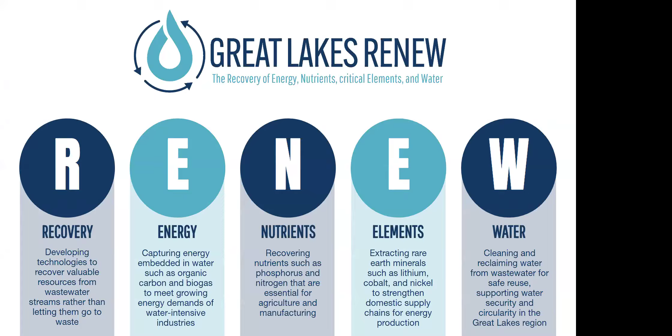As mentioned, Current is the anchor organization behind the NSF-backed Great Lakes Renew Innovation Engine. This is an up to $160 million award from the NSF over 10 years, and it's focused on the recovery of energy, nutrients, critical elements, and water from what is historically considered waste streams. Great Lakes Renew has a couple key objectives. The first is to spur the circular economy transition, to support the invention and commercialization of selective separation technologies, and to attract and retain water-intensive industries into the Great Lakes region, which is inclusive of 6 states around the Great Lakes, including Minnesota, Wisconsin, Illinois, Indiana, Ohio, and Michigan.

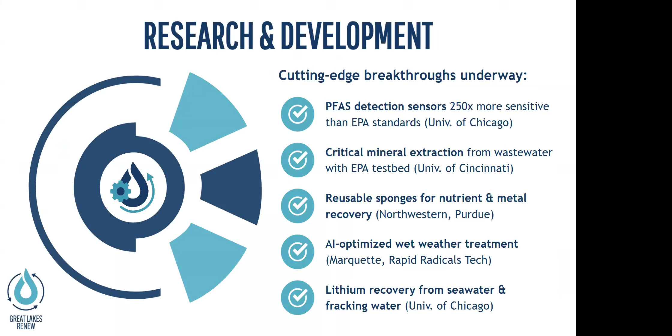One of the arms that Great Lakes Renew and Current uses to support this recovery of critical materials is supporting research and development projects. Here are just some examples of amazing projects that we are currently funding throughout the Great Lakes region, from PFAS detection to critical minerals extraction to AI optimized wet weather treatment. If you want to learn more, we could talk about this all day, but we do want to transition over to our speaker. You can scan that QR code, which will take you to Current's website. You can also connect with us on socials, and subscribe to our newsletter.

Without further ado, I will pass it off to one of our partners, Dr. Soryong Chae, who will introduce our speaker. And just to give everyone an awareness of how the structure will work, we will have about 45 minutes of presentation from Dr. Jason He, and then about 10 minutes for questions and answers and discussion. Feel free to drop any questions in the Q&A box while we are presenting. So I'll pass it off to you, Soryong.

Thank you, Tyler. Hello, everyone. My name is Soryong Chae at the University of Cincinnati. It is my great pleasure and honor to introduce our speaker today, Dr. Jason He. He is the current Laura and William Jens Professor and Associate Chair of the Department of Energy, Environmental, and Chemical Engineering at Washington University in St. Louis. Prior to joining this university, he was a professor at Virginia Tech. He has published more than 280 journal papers and received several national and international awards. He is serving as editor of Journal of Hazardous Materials and Water Environment Research. He was also named a fellow of IWA, the International Water Association, and the Water Environment Federation. Now I pass over my microphone to Dr. He. Please, the stage is yours.

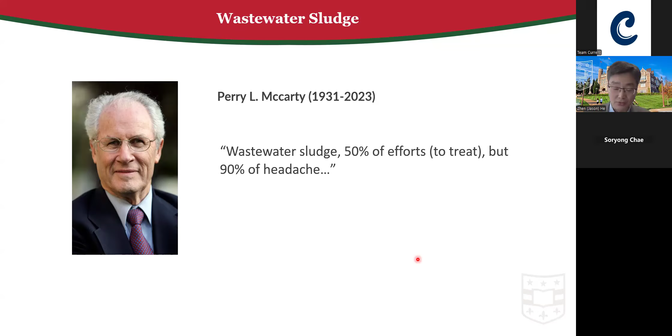Just in case some of the audience isn't familiar, though I assume most of you know it: when we talk about wastewater sludge, actually 98-99% of sludge is still water.

In a municipal wastewater treatment process, we have two types of sludge. Primary sludge consists of large particles, mostly organic materials and other contaminants that precipitate in the primary clarifier. We also have secondary sludge, also called waste activated sludge, or WAS, which is the group of microorganisms we use to treat wastewater. They grow too much, so we have to discharge some of them. So we have two types of sludge.

There are different ways to treat this sludge, and one of the most popular is anaerobic digestion. Idea-wise, it's a 100-year-old, very mature technology. It can greatly help reduce solid content with the byproduct of biogas, which is a source of renewable energy. The approach depends on the area and the preference of the operator.

Sometimes people only treat the primary sludge because it's a really good substrate. The headache probably comes mostly from secondary sludge, because you're trying to use one group of microorganisms to eat another group of microorganisms as a substrate. It's a bit challenging, so you might want to do a bit more pre-treatment.

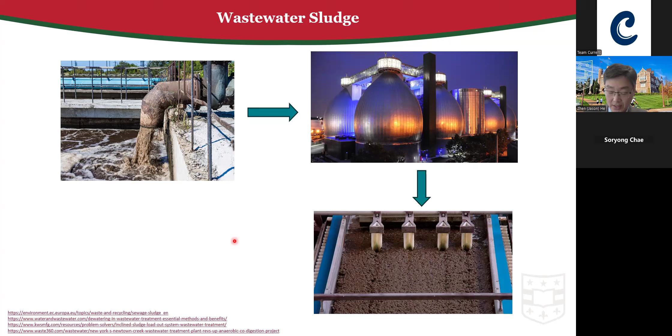Anyway, after sludge treatment, you still get like 98-99% water in that sludge. So next we do dewatering, removing water and reducing the water content, depending on the dewatering process, to 70-80% water. So you create a certain kind of solids, then send it away for further disposal. That's the overall process of wastewater sludge generation and treatment.

So there are definitely a lot of variables. What do we call a wastewater treatment plant? It's a wastewater treatment plant, right? But in recent years, probably the past 2 or 3 decades, more and more treatment plants started to use a new name: water resource recovery facility, or WRRF. That's really a change of mindset—let's look at waste as a resource.

Mainstream wastewater has low concentrations—phosphate is like 5 to 10 milligrams per liter, sometimes even lower, and ammonia nitrogen is like 30 to 50 milligrams per liter on average. It's just too low for meaningful recovery. But when you have a side stream—think about the treatment process I just mentioned, with the anaerobic digester treating the sludge, and after that dewatering—we only show the solid part you haul away, but you still have the reject water, which contains concentrations at least 10 times higher for both nitrogen and phosphorus. Then it makes some sense to do the recovery.

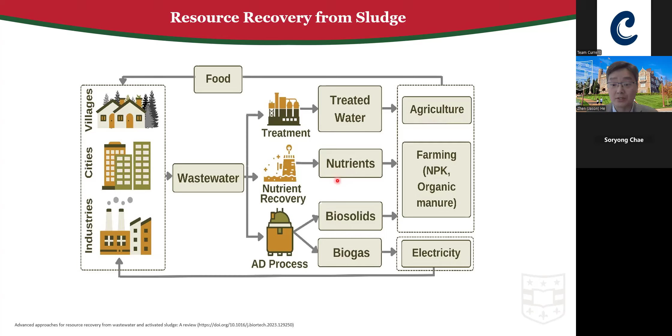I'm not going to go into a lot of detail on biosolids and biogas, because those are very mature technologies. So I'm going to focus on nutrient recovery using an electrochemical method here.

Well, I mentioned there's two types of nutrient, nitrogen and phosphorus. The bigger interest actually is in the phosphorus. It's not saying nitrogen is not important. It's just, think about the surroundings: almost 80% of the air is nitrogen. If we got a really cheap source of energy, you can always get ammonia, right? Although at this point, 1 to 2% of the world's electricity is used to synthesize ammonia, very energy intensive for sure, but you get the nitrogen available.

Phosphorus on the other side is a different story. The only source you get of phosphorus is from mining. So there's a limited storage, right? There are different sources to talk about. We have 100 years or 200 years or 50 years of storage. But anyway, it's limited, right?

So in nature, it takes millions of years for those phosphorus compounds to form phosphate rock. But in society, it only takes tens of years. So we get that phosphorus from the mining process and put it into food production. We consume it and release it to the environment. And if we want to collect those phosphorus compounds back into phosphate rock, it's millions of years. Literally not renewable for us, right? So then it makes some sense if we can get a shortcut to recover this phosphorus from the waste and

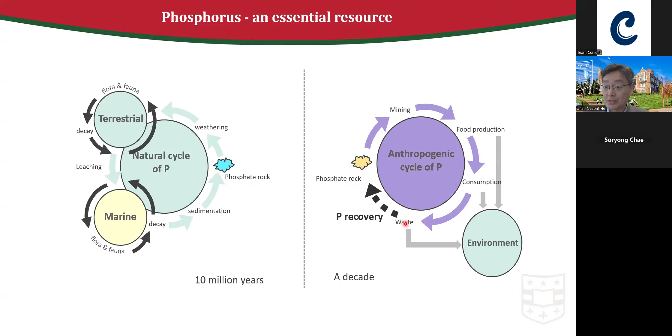reduce the whole process. The wastewater treatment plant, or wastewater resource recovery facility, is actually a major source of the phosphate waste. So this is a graph cited from this paper in STOTEN. It's 10 years old, but still valid, showing the major sources of the phosphate waste. The blue is the wastewater related source. And the green is food waste. You get the pet waste and the deceased pet and human, which all contribute to that waste.

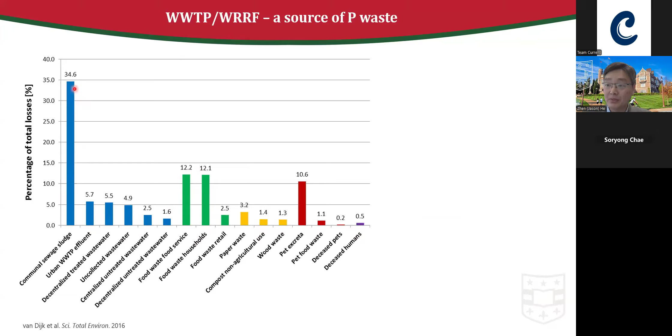But look at those blue ones. So the sludge is dominantly the source of the phosphate waste, right? So other than effluent, the aqueous part of the sludge is a very major source. And what do we do with the sludge? Let's see. This data is from EPA, fairly recent, 2024. Almost 60% land application. A quarter of the sludge goes to landfill. 14% incineration. So we talk about sludge ash, that's another treatment. Then there's 2% others.

So 60%, one may ask, what's wrong with that land application? We can use that as a fertilizer, which is true, right? Depending on the treatment process, you get class A, class B sludge. Some can be used as fertilizer, some just for land application. People are already practicing that for years. And why do we have to recover something from this sludge? Can we just use the treated sludge biosolids directly?

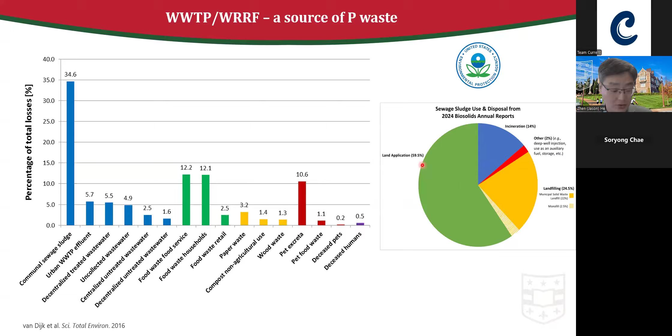Well, things are changing, right? There are always new things coming. And for environmental engineers, we don't want too many new things, especially contaminants, but unfortunately there are. And one of the most attended contaminants in recent years obviously is PFAS. So I just copied this news: Maine has become the first state to ban sludge land application. There are other states discussing and also may follow. So there are challenges to applying those biosolids to land.

So now we look at the issue that we have sludge. It's rich in nutrient. We can do something to recover it. And on the other side, we're facing increasing challenge to apply it directly as fertilizer or even for land application. What are we going to do? Can we come up with something to extract still valuable stuff out of this sludge as a part of its treatment? Because you have to do the treatment anyway. So even landfills are reluctant to receive sludge.

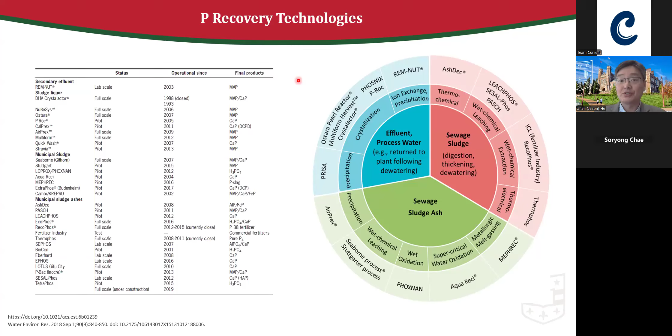Well, recovering phosphorus from wastewater and sludge, again, nothing new, right? There have been many technologies, many companies developing various technologies. So I'm citing the data from a review paper. Depending on the feedstock, you have the effluent process water, that's the rejected water from dewatering. You have the sewage sludge and the sludge ash after incineration. So there are many different products developed to recover phosphate.

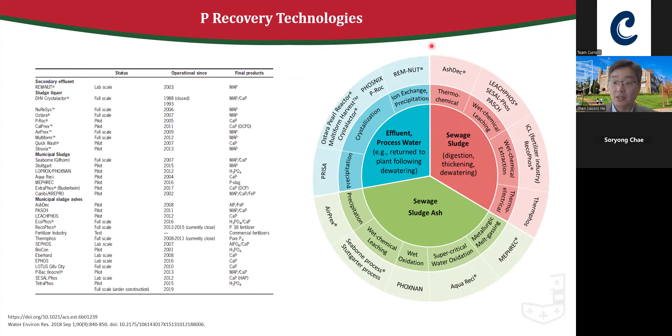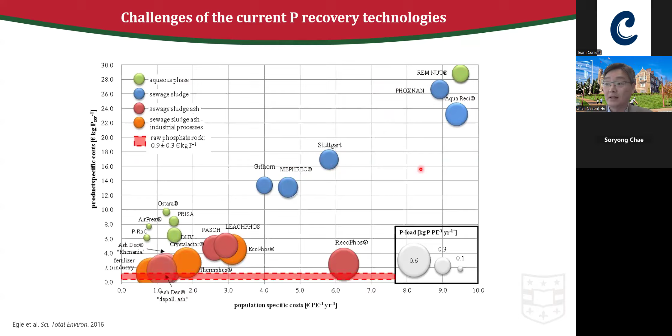So in general, when you look at phosphate recovery from sewage sludge, it's more expensive, right? So if there's an approach to reduce the cost overall, that can make this recovery more economically competitive. So how do we recover the phosphate from sludge?

We have technology like struvite recovery from aqueous phase. But think about this, in the rejected water, your phosphate concentration is like 50 to 70 or 80 milligrams per liter. There's a lot more phosphate in the solid phase, right? So if we add acid, we have a chemical leaching process, and that concentration can be increased to 250, 300, 350, depending on the waste - several times the concentration in the aqueous part.

So that really helps the downstream recovery process. This can be done by wet chemistry process - you add acid leaching, release that, then to recover it, it's the same old story: precipitation for phosphate. Okay, so it works. Then why do we need a new process?

There's always an issue with having to add chemicals, and there's a safety issue. A lot of our researchers don't really consider that, because in the lab we just ask our graduate student to transfer acid using a pipette. What's wrong with that? But in reality, operators have to deal with acid, strong base compounds, storage, transport. There's a lot of other issues involved, including further disposal and environmental impact when you generate such solutions.

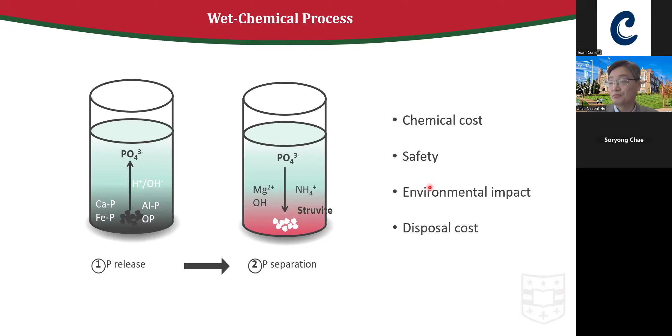So can we have an approach where we don't have to store the acid, store those dangerous chemicals? When we need it, we generate it. When we don't need it, we don't have to produce it or store it. So here comes the electrochemical process.

So electrochemical process - if you understand the battery fuel cell, I'm sure most of you understand that. It's pretty straightforward. We have an anode and a cathode, and at the anode is the oxidation process, the cathode is the reduction process. So the anode is going to produce protons - that means acidification, low pH, acid. And the cathode is going to have high pH, OH minus. So they create two different pH environments.

And we need to think about what we're going to do. Can we take advantage of that? Oh yeah, low pH leaching, right? So that's the acidification - we can leach the phosphate out of the sludge. And high pH precipitation, because for struvite or other ways you want to precipitate the phosphate, typically you have to elevate the pH, increase the pH. So we have these two different pH environments created by the same electricity.

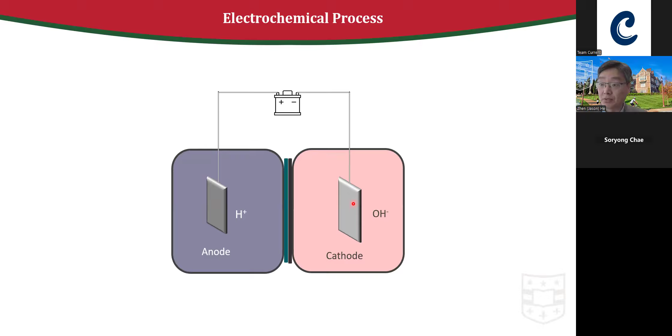Because for electrochemical reaction, the electron is going to move from one electrode to the other electrode. So the same electron transfer process generates two different pH environments. Then let's do something with that pH environment.

So a few years ago, we did a literature review to look at what people have already done, right? Certainly we're not the first - there's already a good amount of work in this field. So we wrote this review paper, looking at the different wastewater sludge feedstocks.

There's WAS, waste activated sludge, digested, just out of the anaerobic digester. Chemically enhanced sludge - there's a chemically enhanced phosphate removal process - and sludge ash after incineration. For the leaching process, that's where I'm going to focus today.

There are generally three approaches: electro-bio, and I'm going to go into a little more detail in the next slides, anode releasing and cathode phosphorus releasing. For the recovery process, I'm not going to go into a lot of detail.

In general, for recovery you need two steps. One is separation, right? You get them leached into the aqueous phase, you want to separate from other compounds that you don't want, then precipitation. So in general, those two processes are involved.

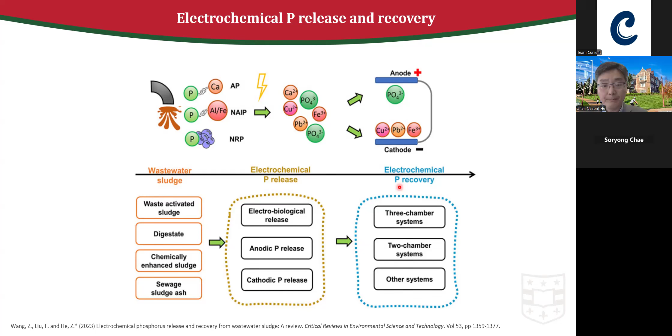So as I mentioned, I'm going to focus really on the releasing, the leaching part. The first method that people have already studied is called electrochemical plus bio - not very popular. Basically, they use electrochemical to destroy something and use bio either to further destroy a compound, release the phosphate, or create a microenvironment for low pH to release the phosphate. Not very popular. The second one, in the middle, is anode phosphorus releasing, the anode leaching.

This is very popular - I'm going to show you the data. Actually, high pH can also leach phosphate. You would think only low pH acidification works, but high pH can also leach phosphate. So we analyzed the literature data. On the X-axis you can see the number of studies by the time we published this paper, and the most studied is anode leaching. There were a few studies about electro-bio, a few about cathodic, and the leaching rate.

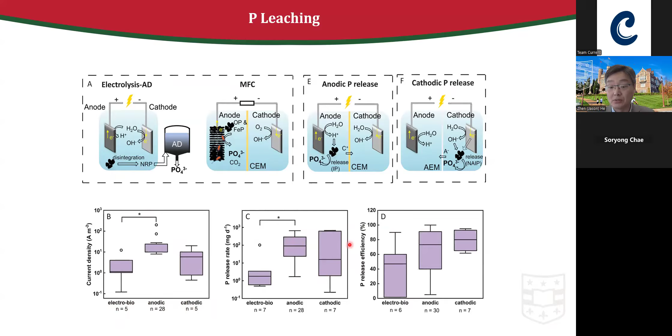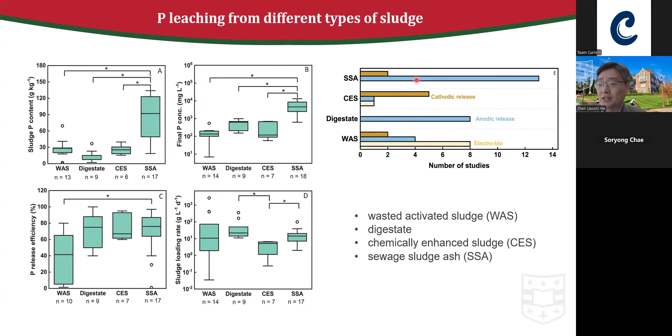And another thing I want to get your attention to is this graph. So ignore the other three graphs. This graph looks like there's a preference, right? Obviously there are more studies about the anode leaching, but there's also a preference to look at the anode leaching that works better for multiple substrates. So then we come to our own study.

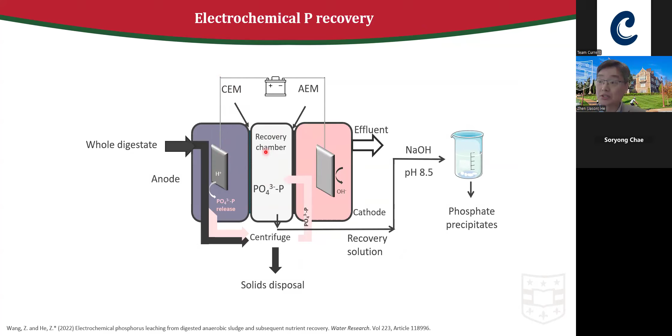That is because of what I just mentioned, there is a cation movement. When the electricity is applied, the oxidation happens, electrons are left, then you have something positive left. So that's ammonia. Ammonia moves from the anode into the recovery chamber. So this cell actually recovers both nitrogen and phosphate. We just focus on phosphate, but nitrogen is recovered at the same time.

Okay. And CO3 in the raw sludge, because AD usually contains high alkalinity, you do have that. That actually becomes quite challenging when you try to bring down the pH because the carbonate is going to consume protons first. So anyway, this comparison shows that the electrochemical process works. We can release the phosphate. We actually also get rid of the ammonia. Not really get rid of, we also recover ammonia.

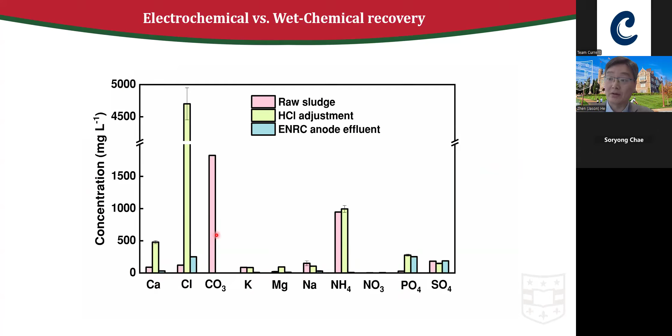We also remove a certain amount of the cations. When you look at the calcium, a lot of calcium here, and potassium, magnesium, but in the electrochemical system, not too much cations in the anode effluent because they also moved. So that's actually quite important for another issue that I'm going to talk about at the end of today, the dewaterability. I'll get back to that after a few slides.

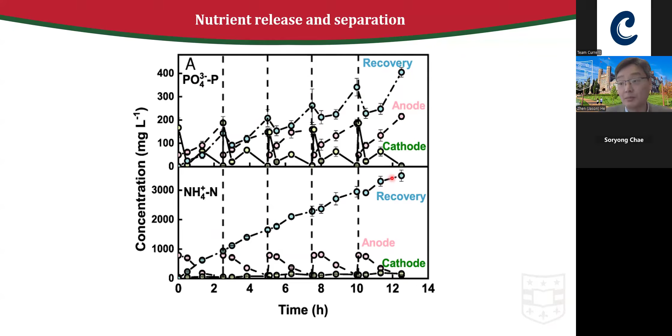So we show the repeated performance when you apply electricity. Those are the batch reactions. The blue ones are recovered. So you can see it's repeated performance. The concentration can get to like 300 to 400 milligram per liter. And this is the ammonia, as I mentioned. At the same time, we do get a recovery of ammonia to over 3,000 milligram per liter. It's like a byproduct at the same time. So it works. It works.

And we did a mass balance, to try to understand what's going on inside the system. You have to do a mass balance. We can get about 73% of phosphate in the recovered solution. That's the middle chamber, okay? And we have about 7% staying in that chamber, don't want to come out. So there could be precipitation. And we have about 10% in the cathode chamber. Remember, in the cathode chamber the pH is increased. There will be scaling, the precipitation. And we have another 10% which we have no idea where they went.

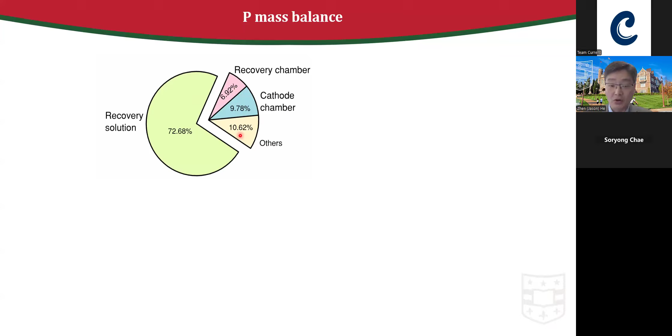Okay, so when students are doing experiments, they take samples like 1 milliliter, 2 milliliter from the cathode for analysis, so some phosphate is lost. So overall, we get about 73% recoverable phosphate. And then we'll precipitate those phosphates into a solid and further analyze the solid. And the phosphorus concentration is about 14 to 15%, similar to the rock.

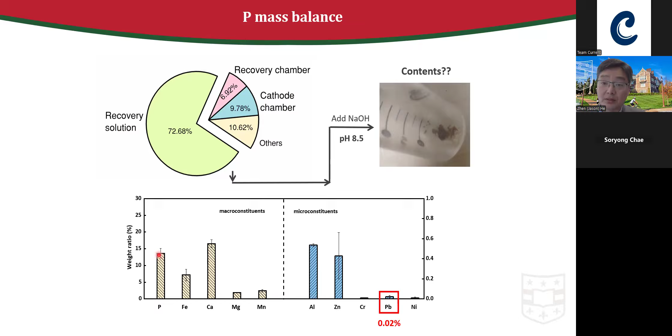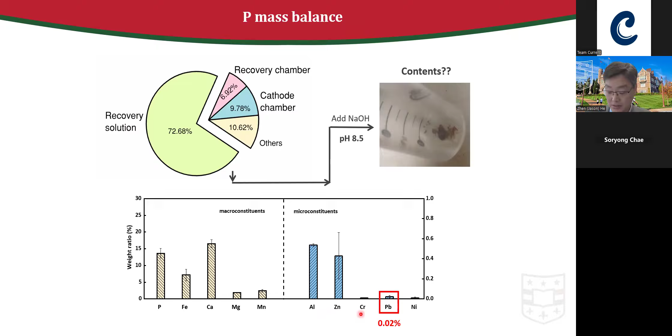Because when you recover the phosphate from wastewater sludge, you probably don't really apply it as fertilizer directly. Even though sometimes it's struvite, it's a really nice product recovered. And a lot of times they're still used as a feedstock for fertilizer production. So for a fertilizer factory, they really just look at the percentage of phosphorus in the feedstock. So the recovered solids are very comparable. Okay. And the heavy metal, that's another concern. So we look at the heavy metal, especially lead, 0.02%. The EPA regulation is 0.03%. So we can possibly reduce the contents of heavy metal and make it meet the EPA requirement.

So during the mass balance, it says about 10% of phosphate just stuck in the cathode. Okay, so they don't come out because of the precipitation scaling. That intrigued us to think, why don't we just recover them in the cathode, let all of them precipitate? Because for any wastewater treatment process or reactor, the simpler the better. The electrochemical system is complicated. You have anode, cathode, you have a membrane, and a three chamber, as mentioned. So that's complicated. That always means complicated operation and more expensive, right? More cost. So what if we just let them precipitate in the cathode and use a weak acid to wash them out? I mean, after some time, so not like after every batch.

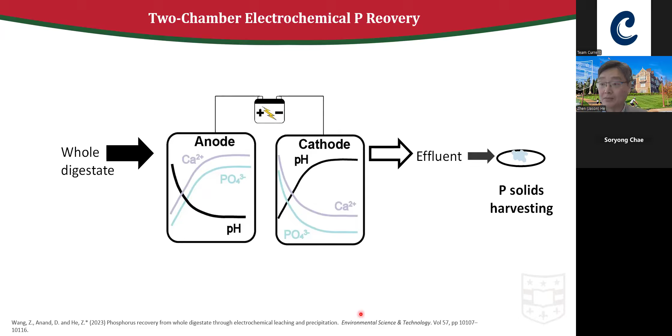So we did the experiment to simplify the reactor, and we can precipitate almost all of them. 98% of the phosphate precipitates in the cathode. And how fast they precipitate is affected by the current. So when you apply different amounts of current, that means how fast the reaction is going to be. So the precipitation rate will be different. But eventually, even at the low current, they can get 98% precipitation, right? The shorter the time, the shorter the retention time, then the smaller the reactor we can have. Again, it comes back to the cost.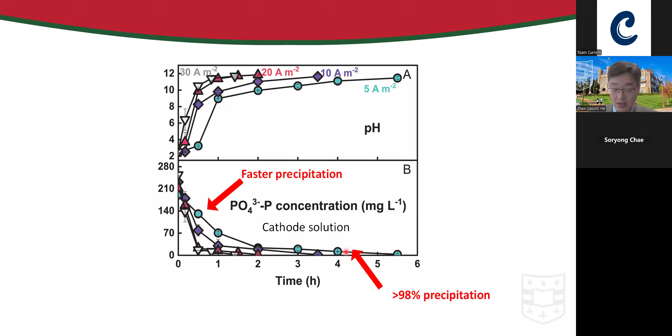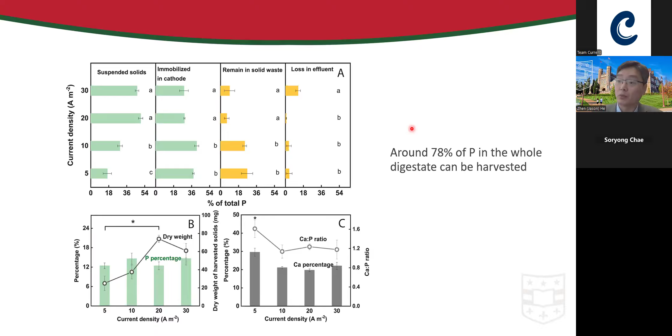And this is a very, very busy graph, so you don't have to look into the details. The main conclusion here is that around 70-80% of phosphorus in the whole digestate, not just the aqueous phase, can be harvested in this way. So previously in the three chamber, we got 73%. Here it is 78, close to 80%. So the recovery efficiency is kind of similar, right? It's a little bit higher, but reactor structure wise, it's a lot simpler. Okay. Again, it's really about the cost.

And we have extended operation for a reactor. You want to see how stable the reactor operation is. And the figure on top, that's the energy. We actually use the energy as an indicator. Should we do some cleaning? All right. So here, the dashed red line shows the benchmark, a new cathode electrode, because the precipitation is happening in the cathode. They're going to start to scale the cathode electrode. So if the energy consumption is around this dash line, fine, let's keep running.

Let's keep running and build up this precipitation. Once it goes up much higher, then we need to do some cleaning. You can see the higher peak for the blue one, that's a higher energy consumption, which means we do have to do periodical cleaning and maintenance, which is normal for any membrane-based process, right?

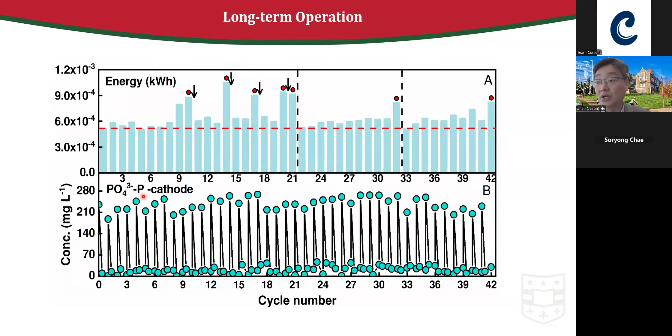And the phosphate concentration in the cathode is around 200 to 300 milligram per liter. It's a very stable performance over a long period of operation. The cost: the energy consumption also relates to the cost. So this is the comparison between our study and the literature.

If you look at the red zone, that's basically the lower recovery rate and higher cost, the least favorable, right? So we want to go to the green zone, this corner, with the higher recovery rate and the lower energy consumption. And here's where our study sits compared to the literature published before our study. So we can possibly bring down the energy consumption.

But where's the benchmark? Getting phosphate from rock is around here. It's hard to beat them, we have to admit. So how can we make this technology more sustainable or more competitive? I'm going to talk about that later. It's co-benefit. Recovering one item is probably not enough to make it competitive. If there are co-benefits, we can possibly bring down the overall cost.

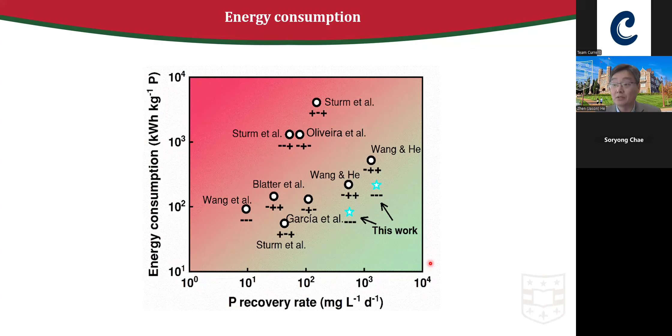Before I talk about that co-benefit, I want to say that the value of the recovered product largely relates to two factors, concentration and purity. The higher the concentration, the better. The purer, the better. So that's the value. So we did an experiment to look at how high a concentration we can get for phosphate after multiple cycles of operation. In graph A, you can see the blue dot, the phosphate concentration can get to over 4,000 milligram per liter. That's much higher than 200 or 300, but this is from multiple cycle operations. We just build up, accumulate, okay?

Can we go even higher? Not really, because at a higher concentration you build up resistance. The additional phosphate cannot move across the membrane because you have a much higher concentration on the other side, and they create a strong resistance. So there's a certain point where it's time to harvest. Then we reduce the concentration for another round of multiple batch accumulation. At the same time, with ammonia stripping, we can get 3 to 4,000 as a byproduct.

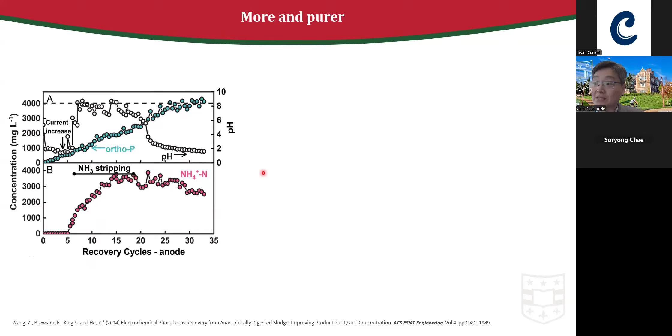When we precipitate those recovered products at that concentration, we make a comparison to just ADS, that's the AD sludge after acid leaching, but without going through electrochemical treatment and separation or further recovery. It's still the sludge. We can leach the phosphate out just by adding acid. It's a pretty good amount of phosphate. Then let's do the precipitation.

First of all, the appearance is definitely different. You can see the electrochemical treatment, this is what we call EPRS, the electrochemical phosphorus recovery system, but it's just a different term for a similar system. It looks much better. It's a white color, it's pure, and the ADS filtrate after the precipitation is still everything's there.

Then when you analyze the elements, the dry weight, the blue bar, that's the electrochemically treated recovery, contains 24 to 25% phosphate by dry weight. And for the sludge without electrochemical treatment, around 15%, right? We also got a lot of magnesium, and we reduce other cations, heavy metals. That's the figure at the bottom. For the blue one, we have almost no cadmium and very low chromium compared to the sludge without electrochemical treatment. And for lead, we have much lower concentration. Not sure why we have a little higher arsenic, but for the majority of the heavy metals, we can greatly reduce their concentration, making your final product more attractive.

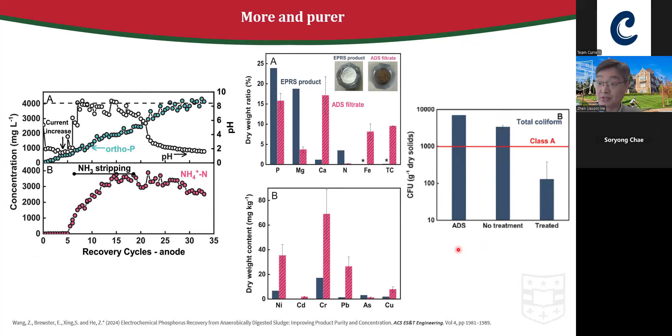We also tested the bacteria, the coliform, because the major indicator for class A and class B sludge is the coliform. After electrochemical treatment, you have strong acid, which greatly reduces coliform. Eventually, after recovery, you still get a solid. You still go through dewatering, you still get solid, and you still need further disposal. So it's a class A sludge, and the coliform can be much lower.

All right, so how do we get to the dewatering? I spent most of today's time talking about the nutrient recovery. How do we get to the dewatering?

So that's what happened during the lab research. After the students worked on electrochemical treatment to recover nutrients, we got really interesting data. We published it, all happy. Now we come down to think about it, we still get a bunch of solids. What are we going to do? That's still the sludge. It should go through dewatering and further disposal.

So I asked my students, can we do some further tests to see what effect this electrochemical treatment has? There could be others - we discovered a disinfection effect. That's the bonus effect, a co-benefit.

Is there something else? So we test the dewatering here. The parameter we didn't use is CST, which is a common parameter for dewatering. We use SRF, specific resistance to filtration. Just in general, the lower the better.

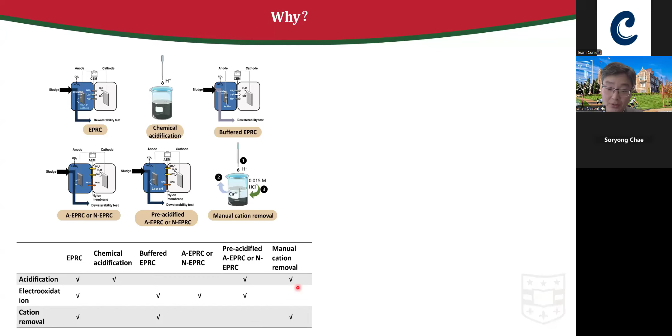So they do have the cation removal, okay, but no acidification. And when we have manual cation removal with acidification, it works, but not as well as the electrochemical system. All right, so what's our conclusion? All three factors contribute. Acidification is important, but cation removal is actually quite important. When we have cation removal, they can contribute, but neither can work alone, right? So a single factor will not work alone to improve the dewatability.

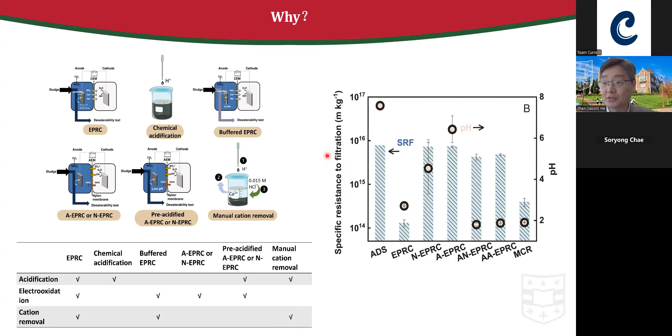So do we fully understand it? Not really. We have the data to prove certain factors, but we don't really have the data to understand every mechanism. But we have a hypothesis. It's not proven. It's an unproven hypothesis of the potential mechanism involving this enhanced dewaterability. Okay, so the stuff I'm going to talk about, I don't have strong data for. We have the data to prove some phenomena, but not everything.

So we have the original sludge flocs. A lot of flocs have negative charge, so we do have cations inside to balance the charge. When we have acid, that's the leaching acidification, they start to release the cations, but the cations are still in the solution. They are just released from the flocs, and that helps the flocs start to bond to each other, because the cations function as a bridge or connector. So you remove some of them, and then some flocs can start to aggregate and become larger ones. So that releases the water, the bound water. You have free water and bound water. Okay, that enhances the dewaterability, but those cations are still there. So the effect is not maximized.

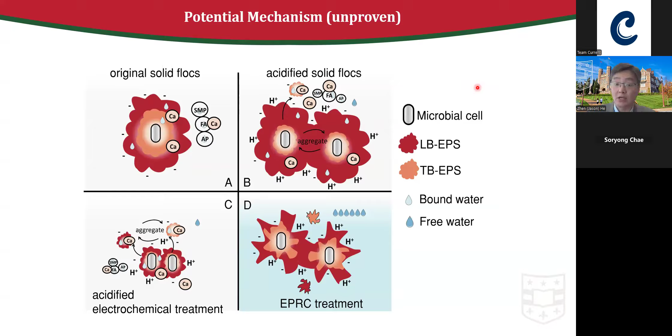Then when we have acidified electrochemical treatment, we thought there might be some electrochemical oxidation that contributes, because electrochemical oxidation breaks down EPS or other compounds, which starts to affect the structure of the sludge and helps release the bound water. Then we have everything together. The cation is gone. So look at D compared to B, simple acidification, where the cation is still there, right? In D, the cation is removed. Then that bonding, that bridge, is completely gone. The connector is completely gone. Then the sludge flocs can really start to aggregate and maximize the dewaterability. Again, this is an unproven hypothesis. We don't know whether it's true, or the percentage each factor contributes to the overall dewaterability. We don't know yet, but at least the initial data we got helps guide further research. We're actually continuing the research in this area, and we're pretty excited to see this phenomenon.

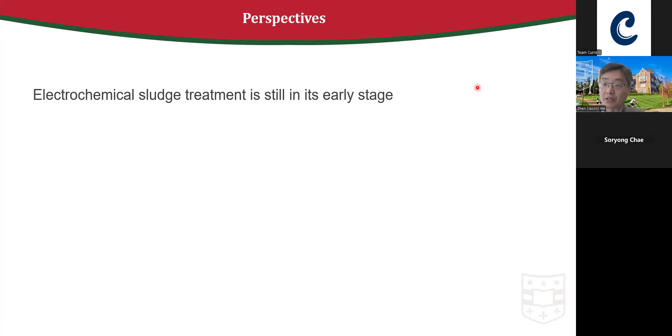All right, I think it's around the time to conclude. Some perspective: electrochemical sludge treatment is still in its early stage. There are full-scale applications like electroosmosis to help with dewaterability, but when you look at treatment that really breaks down the sludge and extracts something from it, we're still at a pretty early stage. Just recovering something alone from the sludge probably won't make it cost competitive, right? So we have to look at co-benefits, for instance, the dewaterability. That can be a big deal. It reduces truck hauling and storage, which can make a lot more sense. And we have disinfection to make a Class A sludge, if a state still allows us to use the sludge as a fertilizer. So again, we start to explore the co-benefits and bring all the benefits together to help reduce the overall cost of this recovery technology.

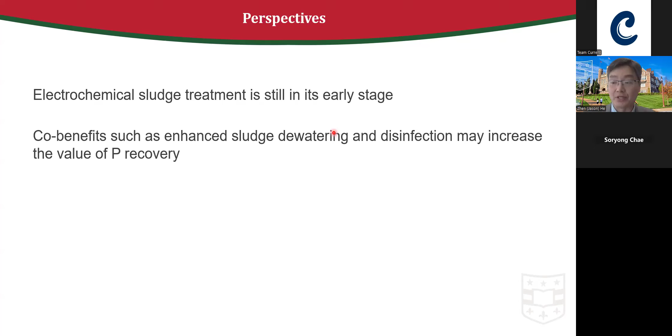The big challenge, probably, and every time I present things like this I get this question, is: what about energy consumption? An electrochemical system is energy intensive, which is true. I have to admit, the electrochemical process is energy intensive. We hope there's renewable energy, there's biogas, and more treatment plants start to use solar panels, and hopefully the energy cost is brought down and makes the whole process more cost competitive.

Another thing is that one of the key reasons people nowadays are slowing down sludge land application is emerging contaminants. Can we have one of the co-benefits be looking into the removal of these emerging contaminants? As I mentioned, there could be electrochemical oxidation. To remove PFAS, you either use adsorption, which is very effective, or if you want to destroy it, probably advanced oxidation is still one of the very effective approaches to be applied. Now, finally, I think the application needs to be identified.

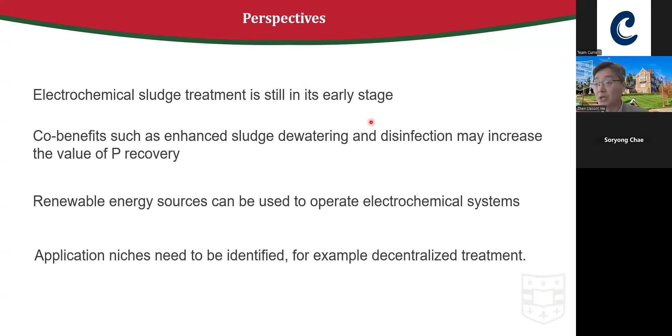Would the technology be universally applied, or should it be identified for a certain niche, decentralized treatment? That has really helped to accelerate the adoption of new technology, because sometimes a certain niche can afford more expensive technology compared to many other places. So really understanding the application niche will help with technology development and adoption.